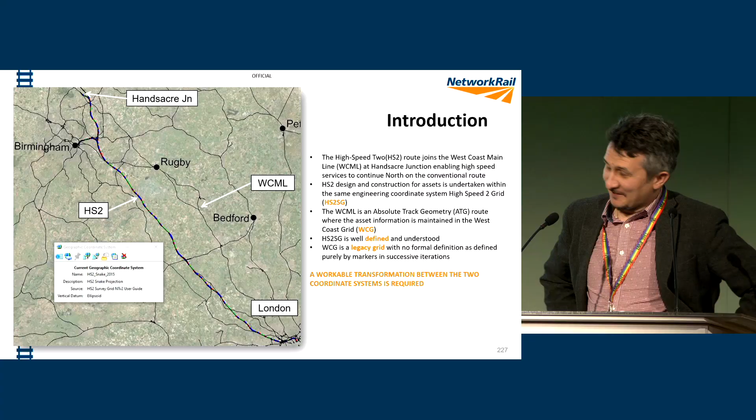Where should we start? This is a story of West Coast Mainline in Handsacre Junction - more or less a story of what we did to integrate the designs into grids. And there are some prerequisites there.

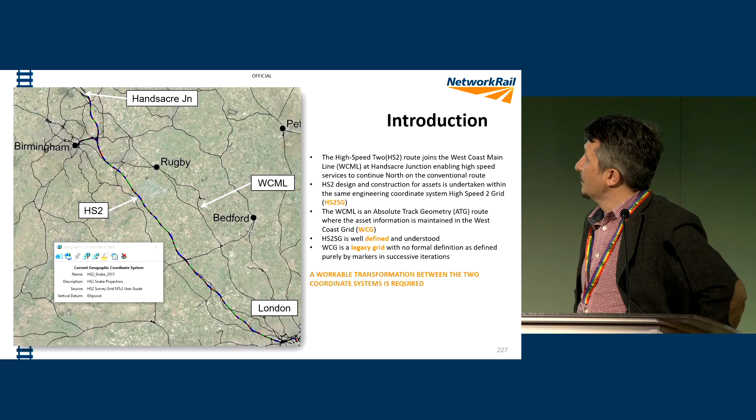HS2 route joins West Coast Mainline in Handsacre, and further they need to continue on the conventional route north. HS2 design is mandated in HS2 snake grid. West Coast Mainline is an absolute track geometry, so is mandated in West Coast grid where the assets sit.

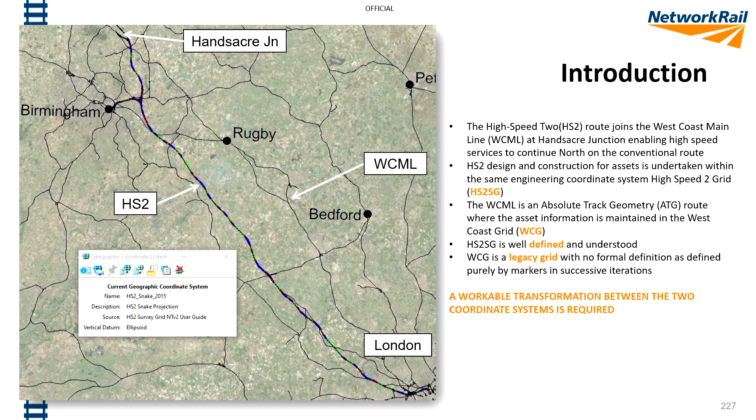HS2 snake grid is well defined. West Coast grid is a legacy grid with no formal definition. So we have an issue there - that means we need a workable transformation for the digital world we live in.

A few things about HS2, as you guys know - the elephant in the room is obviously the largest infrastructure project in Europe. Goes from London to Manchester and Birmingham when finished. Phase 1 delivery 2029-2033. It will integrate with the conventional railway network and new terminal stations, and a few more facts as well.

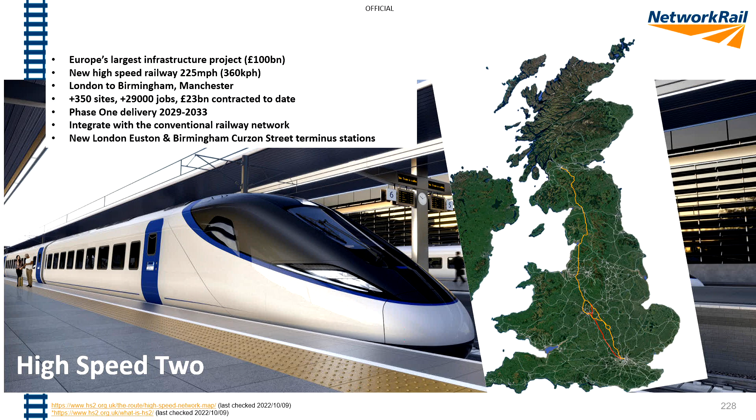I'm not going to tell you too many things about West Coast Mainline - you guys know probably more than I do, and I will ever do. However, a few dates to consider: 1838, 181 kilometers. 31 years later, 1,127 kilometers, with connections to Northampton, Birmingham, Manchester, Liverpool, and Edinburgh.

Modernized absolute track geometry implemented 1994-2009, 125 miles per hour, or 200 kilometers per hour. So it's one of the busiest routes in Europe.

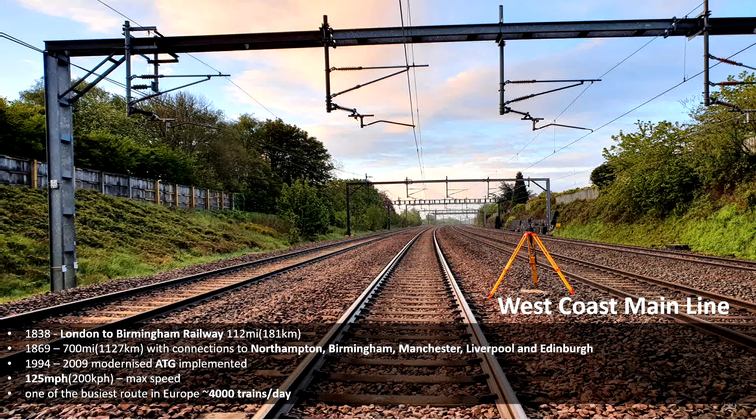So what is the issue? Well, the project required a transformation in such a way that the alterations to the West Coast Mainline infrastructure are seamlessly and accurately linked with the respective High Speed 2 works.

So across that dotted boundary, you can see that we have the West Coast Mainline, which has its assets maintained in West Coast Grid. ATG is maintained in West Coast Grid. West Coast Grid is installed in situ - what does it mean? We have spigots on the boundaries and survey PRMs precisely marked and coordinated.

There is no formal mathematical definition of parameters currently. And by not having that, there is no GNSS compatibility.

Then we have the HS2 mandated design in HS2 survey grid. HS2 is not in situ, so it's not installed right now. There is a formal definition and it is GNSS compatible.

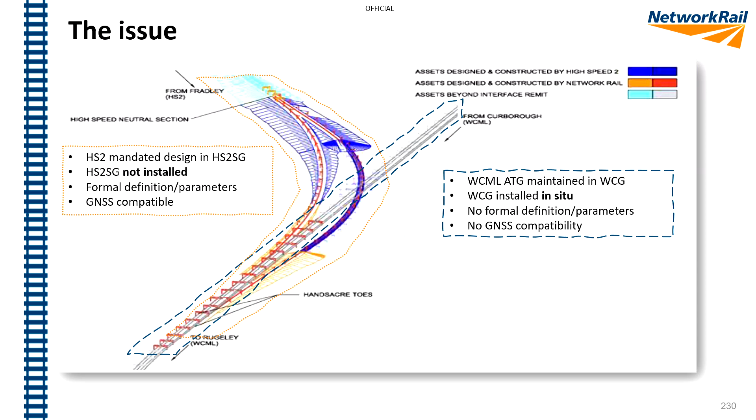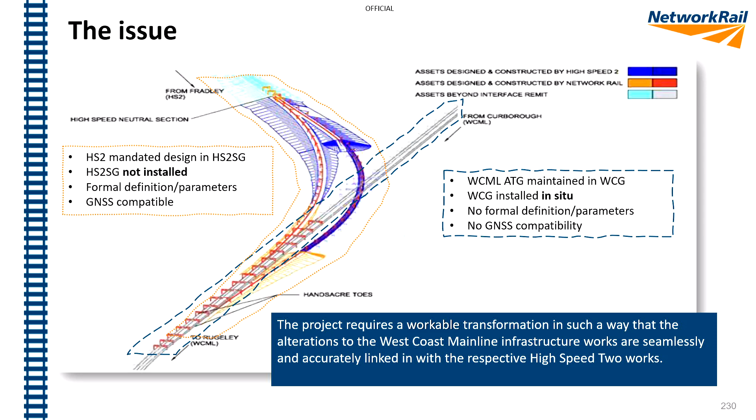That poses an issue for us, and that again caused us to inquire ourselves and see how we can work it out. So that means we need to have a workable transformation in such a way that the alterations to West Coast Mainline infrastructure works are seamlessly and accurately linked with the High Speed 2 works.

So the proposed solution - we sat a little bit, looked at it. Obviously we need to create a transformation parameter - that's the first step we'll look at. However, we didn't go with that.

We decided to apply a local projection, based on the transverse Mercator projection. However, a little bit more complicated - we went to a transverse Mercator with an affine process. Why was that? Because it's readily available across the design packages, across all the major design software suppliers.

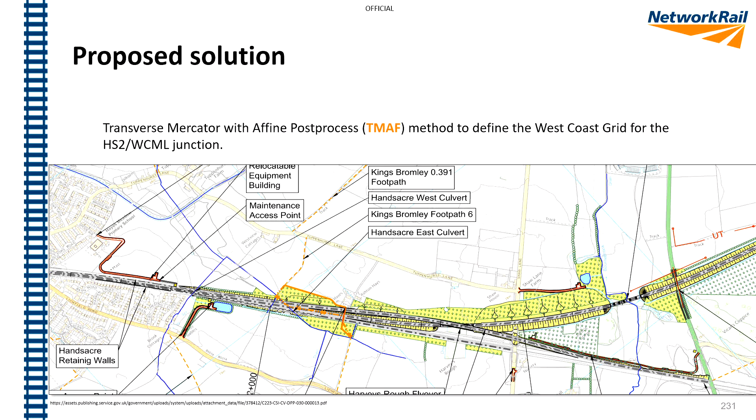So what did we do? We proposed, we had to do some surveys, where we've linked with the continuously observed reference stations, which are those three in the corners where it says the primaries - primaries GNSS - and then we've installed five primaries. We installed 7 secondary coordinates, seven secondary PGMs. We did traversing, we did leveling.

As you could see there in West Coast, in the middle West Coast grid, we had already the existing spigots portrayed here, which we had to coordinate as well in the same survey in order to obtain two sets of coordinates in both grids. And for that, we would have obtained the transformation parameters.

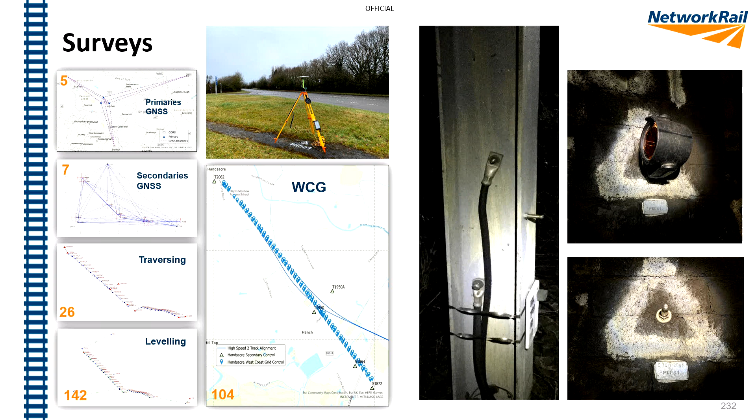So the work was undertaken to be compliant with the Network Rail standards. It was finished, took a period of 3 months and finished around May 2021. A further secondary benefit was to provide the survey control suitable for the construction phase of the project.

And we did a GNSS campaign with all that in place, a 5-step processing. We verified the Ordnance Survey CORS stations. We validated the observations, checked internal and external observations.

We did post-processing, primaries to CORS, those ones 1, 2, 3, and then there's a little one in there, Lichfield in the middle, 4. And then we did post-processing on the secondaries in relation to the primaries, as best practice says, and in relation to Network Rail standards.

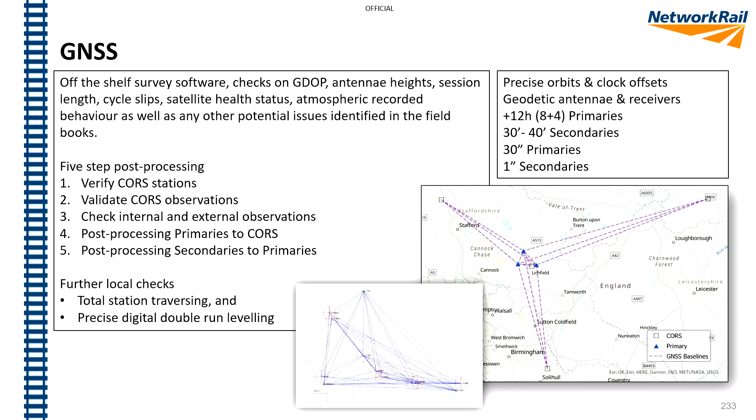Then, obviously, we had to do traversing and leveling to observe those 104 spigots and existing markers from the West Coast Mainline. And also, we processed them in HS2 survey grid at the same time.

So there are 9 steps over there, where we processed in various ways by trying to get the best fit plane first, and then we calculated the elevations for the main traverse. We did the integrity check observations for the trigonometric observations. We tested the traverses, constrained the traverse, and then calculated the HS2 snake grid coordinates.

In West Coast grid, it was the other way around - we had the coordinates given, 104. We'll see them in the next slides.

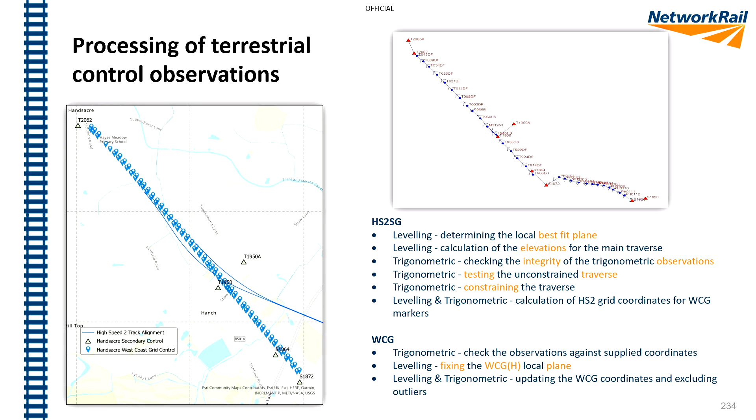So we checked the observations against the supplied coordinates. We did fix the leveling on the West Coast grid height on the local plane, and then we did the leveling and trigonometric processing by updating the West Coast grid coordinates and excluding the outliers, as we normally do every survey.

Excuse me, I think I need some water.

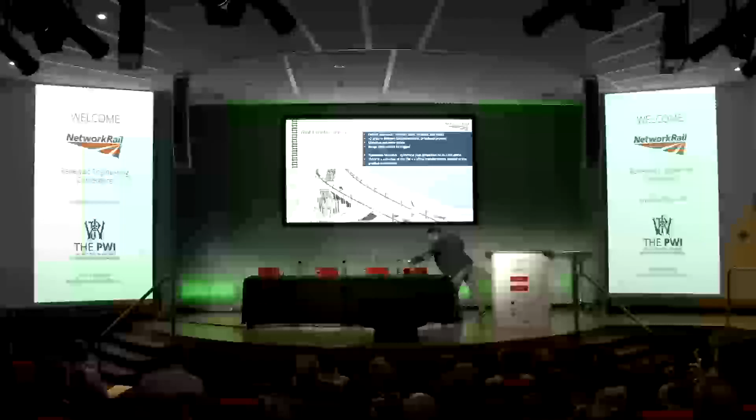Just leave you with this beautiful slide, which is not really explaining, but... I usually live on Teams, so if I behave like a sociopath, let me know.

So what's happening there? The de facto standard method for conversion of data between two projected grid systems is to derive and implement a Helmert transformation, which is coordinate shift, rotate, and scale. That means that such transformations, if we have multiple grids as we have them in Handsacre, you need multiple Helmert transformations.

Or create a vehicle, a grid vehicle, to transform from one projected grid to another by using another grid. So this process can be laborious and error-prone, particularly when manual entry of parameters is required.

Instead, we went to transverse Mercator with affine postprocess, which is a subclass of transverse Mercator, which includes a final processing step that is following the projection of the geodetic latitude, longitude onto the transverse Mercator plane, then applying an affine transformation to the gridded coordinates.

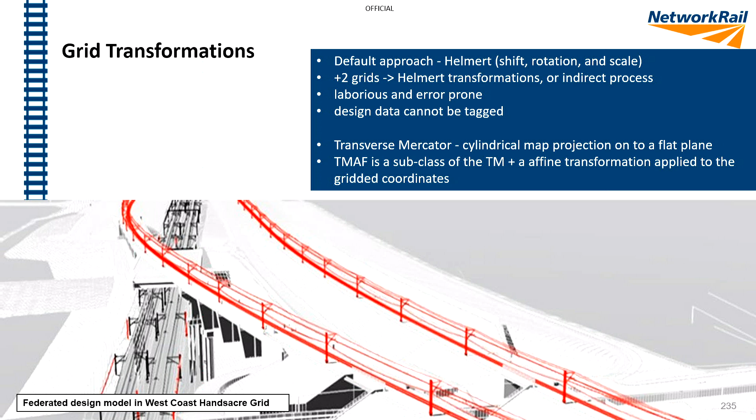We're getting there, so this is another beautiful slide. We had, using the acquired two data sets of control points, the affine parameters calculated via the process described, which is three steps again.

We had to define the transverse Mercator projection in the area. Then we added an affine transformation with those beautiful matrices over there. And then we estimated the A0, A1, A2, and B0 via least squares.

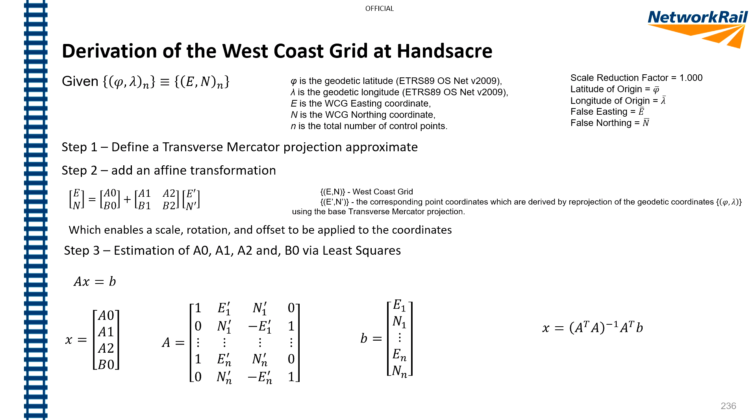101 points - I did say I'll mention them - 101 points out of 104, 3 were removed due to mistakes, gross errors, and outliers from the survey.

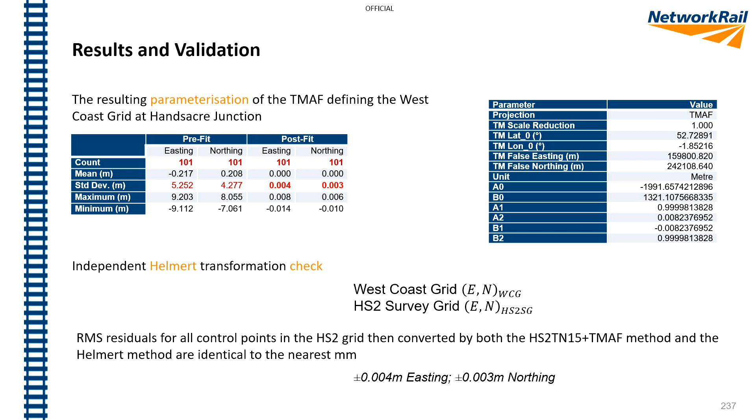Okay, so we defined the projection. What's next? Next, we have to make sure that the projection is suitable for the digital environment we're working on. Because West Coast Grid is a legacy grid featuring relatively unknown characteristics, this necessitated an assurance check on the fitness of purpose.

And to check that, we've downloaded a coarse digital terrain model sourced from Shuttle Radar Topography Mission, and we've used it to generate ellipsoidal reference ground points across the domain of interest, around the junction. These values enable the generation of a heat map showing the map projection distortion characteristics of the new projection for the area of interest. So all distortions were within 20 ppm.

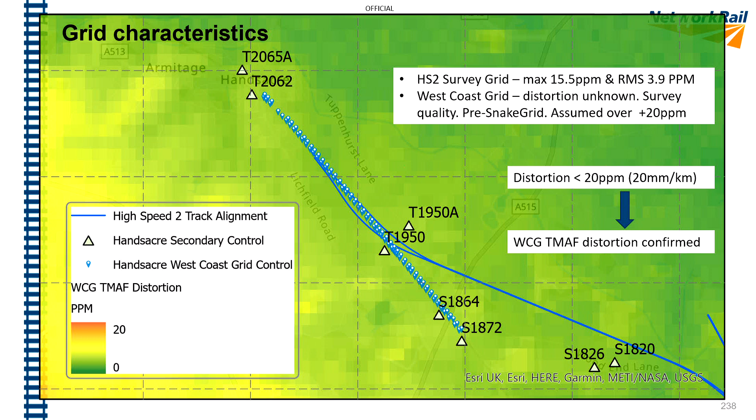So the West Coast grid at Handsacre is confirmed as viable. Not a really big surprise, but we were expecting something similar. And that means it's viable for design and engineering coordinate space, as we hoped for.

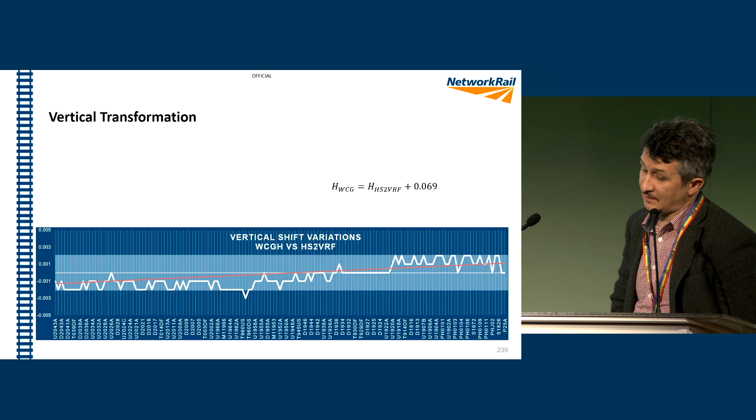It should be noted also that the parameters denoted only operate to attain planar grid coordinates and do not affect or indeed achieve heights above project datum. And as part of the control survey works, we've determined that there is a 69 millimeter difference in levels between West Coast grid

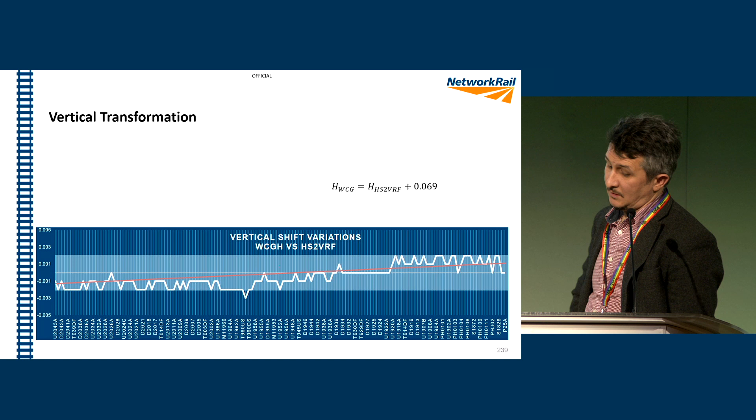height and HS2 survey grid, or HS2 survey reference frame, vertical frame, which is over there. So by applying those 69 millimeters,

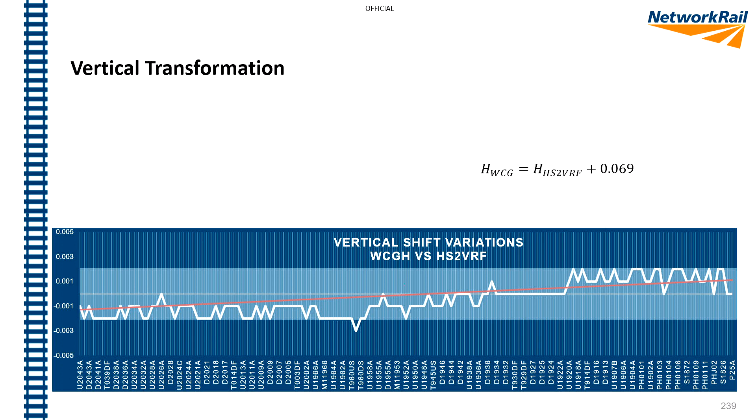we got a trend line for each point from low miles to high miles. And as you can see, the trend line, the red one, referring to West Coast grid heights, is within 1 millimeter plus minus, when we apply the correction.

Implementation. So the West Coast TMAF file was disseminated to users via Bentley Managed Workspace. What is that? If you're not a surveyor or a designer, you don't know what that is.

So Bentley Managed Workspace - practically we've created a little file, a parameter file, we've applied it and distributed it formally to projects around the area. We've put it into the common data environment and created a little guidance where each designer can apply, yes, or include this file into the design software. And in this case it was Bentley MicroStation.

And there are a few benefits. It's reversible, increasing efficiencies, compatibility with web map services.

I'll show you another slide at the end showing the web map services. There's assignation of coordinate systems, geographic coordinate systems made within the design data, so you can easily identify what grid your file is in. We've had this issue in Network Rail, with direct relationship to West Coast grid and GNSS positioning.

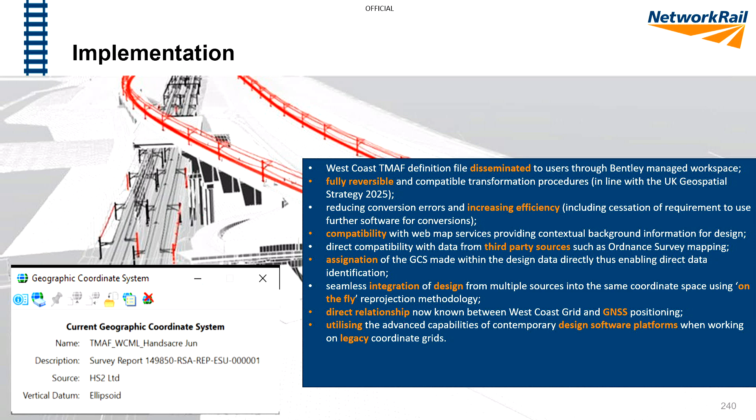However, we've learned some lessons as well. HS2 remitted Network Rail through our NetworkWorks contract to develop the Handsacre slow line connection in parallel with HS2 main works. The civil contractor is remitted for the design of railway substructure elements such as civils, embankments, viaducts, and structures. These figures outline the contract delivery partition mechanism employed by the contractor entities, highlighting the necessity for a robust and efficient transformation approach for design information between the two grid systems, to enable track alignment developed by NetworkWorks to be used by the main works civils contractor to define railway substructure.

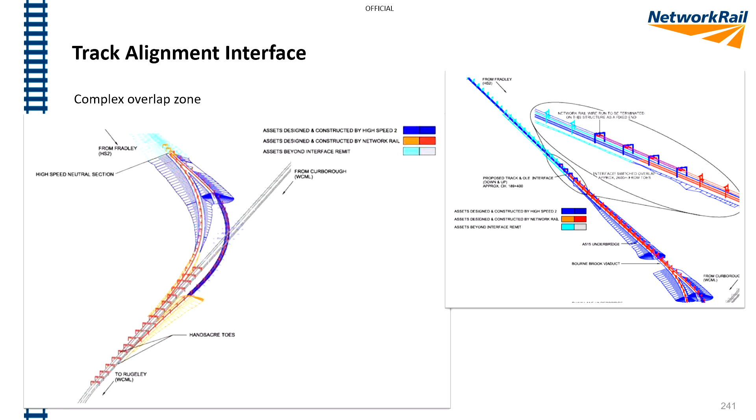What this means is the geometric arc was broken down into 64 linear chords, losing its true geometric properties. Since linear straights are geometrically preserved when transformed between survey grids, selecting the interface point on a straight with a fixed gradient mitigates this inaccuracy. So it is recommended that when there's a need to design and deliver track work across different survey reference frames, project scope and contract boundaries are defined with consideration to the track geometry features, to ensure there is a section of straight with constant gradient.

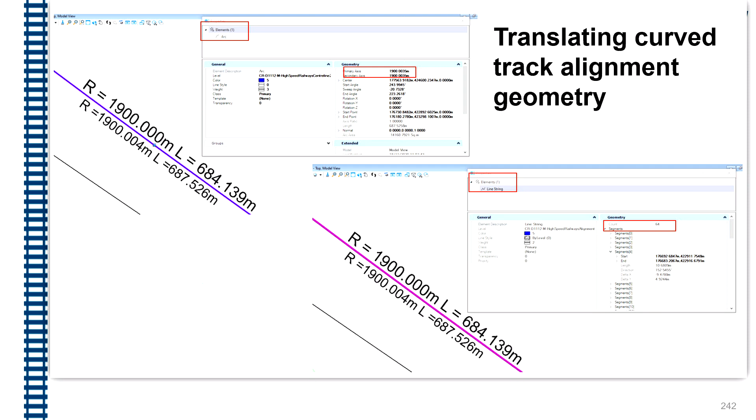Although the use of chainage to describe linear location of design boundaries is commonplace, due to the differences between datums and track baseline lengths, there is a need to manage the interface in coordinate space. Furthermore, the definition of a single point will ensure commonality of the alignment at that point. This is the same point in two survey grids - as you can see, you have two different coordinates.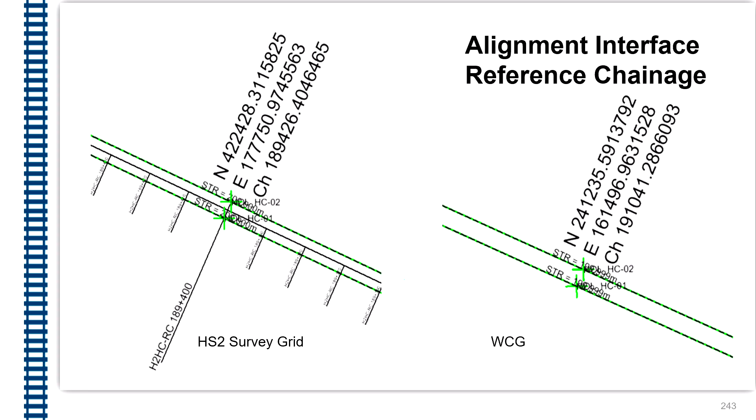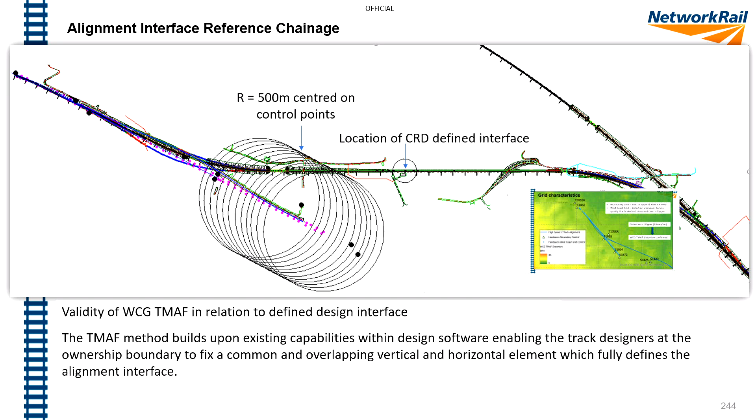So the validity of the West Coast Grid transverse Mercator, with the defined process in relation to the design interface, is that although this paper recommends validity of the TMAF only within 500 meters - those circles over there - the points in this line can be seen that the identified design interface point, location of the CRD defined interface on the straight line, is beyond this boundary. However, the TMAF heat map from a previous slide in my presentation demonstrates within this zone that the coordinate space remains of an engineering quality. That's very important, and can be utilized to define the alignment geometry in both survey reference frames.

So the conclusions: the TMAF can be used as a flexible solution. The principal application is not only for railway, it could be used for every single legacy project where we're interfacing with legacy grids or legacy asset grids, where we can replicate that. In particular, the principal application is to define local or legacy grids within the design software platforms - that's very important. It's an accurate and compatible transformation procedure with infrastructure designs. The significance of benefits includes streamlining conversion procedures, reducing potential for errors, and a few other things. It's generic - that's very important.